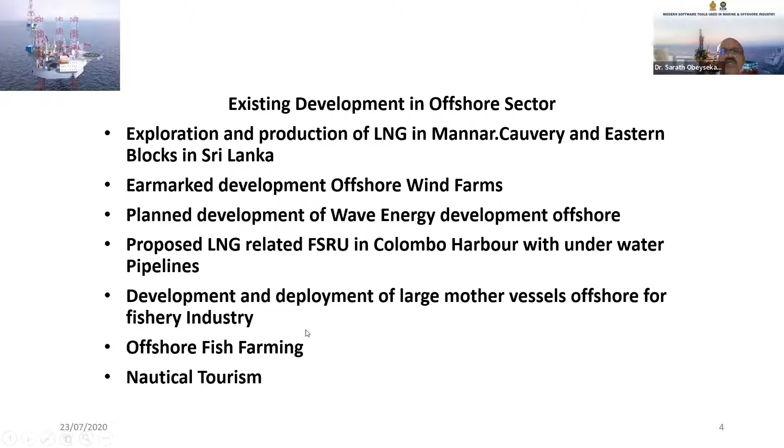And finally, of course, we are talking about nautical tourism, where we are trying to develop, like in other countries, like European countries and Singapore, yacht services, yachting and leisure boats and things like this. We are trying to develop 23 small harbors right around the island. That's other areas.

Our intention is to develop a curricula for existing universities and train engineering, safety and reliability experts, blue collar expertise, and financial experts as well. Also in the planning sector, we want to teach them general use planning tools. The courses may come in time to come.

We will also invite foreign universities to tie up, like some countries do, such as India or even one of those islands near the states. And then we have development of safety and reliability studies in the universities.

We want to give a little bit more than what you learn, training Sri Lankan and foreign experts in conducting hazard and operability studies, safety and maintainability. All these things are related to this high-tech industry of oil and gas.

I've just listed some old companies, but there are new companies which Kapila might introduce - the company which is now going to do a presentation is also heavily involved in this industry. I've just listed some old companies, but there are other target consultancy companies who intend to come here.

If you have read the newspapers recently, Reserve, a US company, has already started some outsourcing program with IFS. And now they are trying to hire students to train them and work in this industry that we are talking about.

I am basically from Trimble, and Trimble is a hardware and software solution provider. For today's agenda, we'll have a little bit of introduction about our company Trimble and what we are, and then we will see about the design and engineering part—process engineering and process design, not the analysis and design, so it's process design and designing the complete shipbuilding.

You might be interfaced with different other software apart from the structures, so how with the help of Tekla Structures this is possible—that's what we are going to see. And then the benefits of BIM modeling: once my 3D model is developed, how the 3D model can be utilized for the rest of the project life cycle. That's what we are going to focus on today.

We also have at the end what we offer for students and how you can learn this software.

Moving ahead, as I said, I'm from Trimble, and Trimble's key things are positioning, information, and communication—these are the three pillars of Trimble as a company. We focus on conveying information to the complete project stakeholders, and on communication, with information that is loaded and can be used for the entire project life cycle.

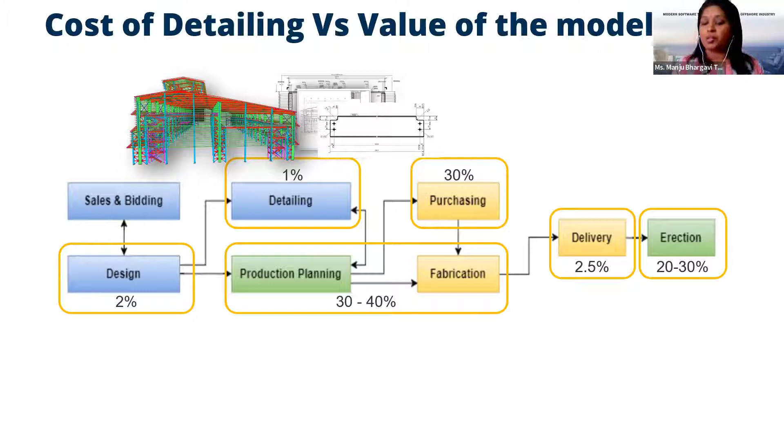So these fabrication drawings are a byproduct of my 3D model. If there are any variations in my 3D model, I update the 3D model, and my fabrication drawings will be automatically updated. So I want to focus on my model only and reduce the work on the drawing and detailing side, because today's young professionals in the sector are not interested in doing repeated tasks, and they always think about automating repeated tasks.

This is where the solution will help out. It will help you extract the materials, which we call MTO, material takeoff. Whatever material you have used in the 3D model, that material takeoff can help you for procurement. It's not only the steel material, it's also any fasteners like bolts and nuts, and also the weld material, which is very important in offshore structures.

You can also plan your fabrication and erection sequences. Based on the erection sequence, you plan your fabrication. Otherwise, what happens, suppose I'm taking an example of two columns and a beam, and if I'm just getting the beam first in fabrication for erection, but I don't have the columns which have to be erected first, there is no point, right? I have to wait until my columns come up. So always plan your erection sequences and accordingly plan your fabrication sequences.

Then you track your transportation, stacking, and all of these things. In the case of steel, it's more about automation. You should have a methodology to link it with your CNC machinery, and at the same time, whatever solution you've developed should be able to do the connections, and you can also extract this information and take it to any connection design software. When you are erecting at the site, you should know whether that particular assembly can be lifted by your cranes, or where my crane location should be so that I can optimize crane utilization.

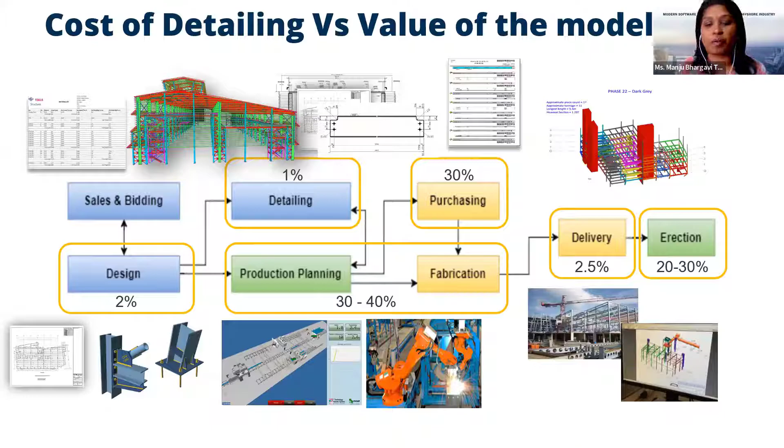So the focus areas, if you see for the execution of the project, I call it constructible. So it also means it should be fabricatable or manufacturable, whatever you call it. So it should be constructible. So when I say any tool that we are selecting, it should be constructible. What I mean to say is you should be able to create the 3D models.

It should also handle changes easily. So the solution should be parametric, wherein if I change the beam sizes, if I change my column sizes or my tubular sections or my miscellaneous steel like handrails, so today my platform size has to be changed a little bit, you should be able to do that. It should be parametric. I just type in whatever the values are and then based on that, it should modify.

So all my deliverables are a byproduct of this 3D model. I just focus on my 3D model, and the rest of the things should be automated, right? And collaboration is also key.

As I said, Tekla is a structural BIM solution, and in any project, you have a mechanical engineer, you have different disciplines. You may have a piping and equipment guy, an electrical guy, a civil guy, a structural guy. So all of them might use different software because everyone wants to use software that is competent enough in that particular discipline.

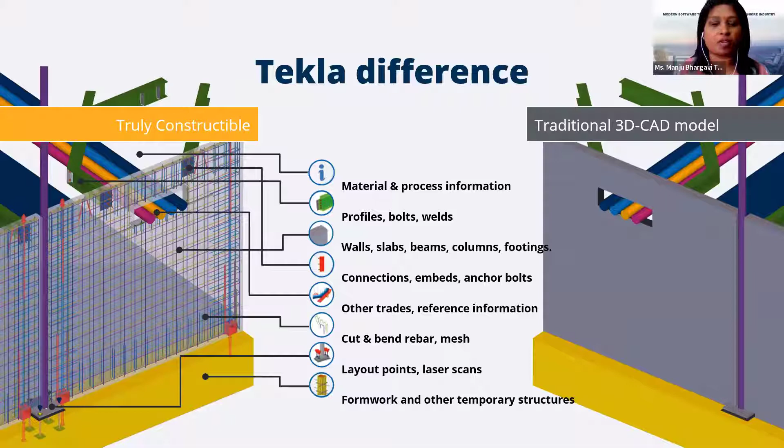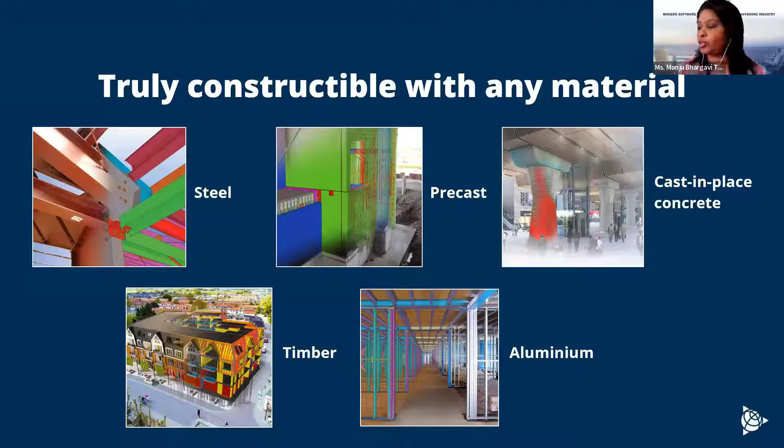So with form work, you'll have complete information once you have your 3D model, which can be used for the entire project life cycle. Every piece of information which is needed. And as I said, take aluminum, timber, precast, any material, any type of structure you name - it's possible to create. It could be bridges, airports, anything. So it's one single solution for all structural modeling.

In the Tekla products portfolio, we have Tekla Structures, Tekla Structural Designer, Tekla Tedds, Tekla PowerFab, and Tekla Trimble Connect. Tekla Structures is building information modeling for structures. Tekla Structural Designer is an analysis and design solution purely for buildings. Tekla Tedds is for structural calculations, basically 2D frame analysis and connection designs. Tekla PowerFab is for production management, a steel fabrication management solution. And Trimble Connect is a common data environment where you can store project information, collaborate, and communicate with other project stakeholders.

As we've just seen before my presentation, you have partnering or consultancies working in UK, US, Middle East, India. We support 36 country standards. So when you take the software, it comes with 36 country standards, and you can work as a consultant for any company using any country standard.

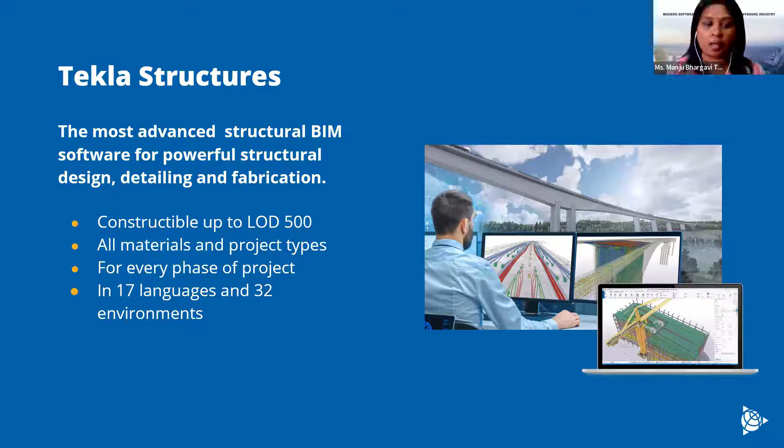Any type of structures - it could be shipbuilding, deck or jacket or platform, any type of structure. So to start with, we'll see Tekla for offshore structures, but also the different solutions we have for modeling, linking with machinery, robotic welding, laser scanning, and other tools. Tekla comes with an open API, so if you want to get into software development and automate some of your repeated operations, using the Tekla API you can develop your own tools specific to the requirement.

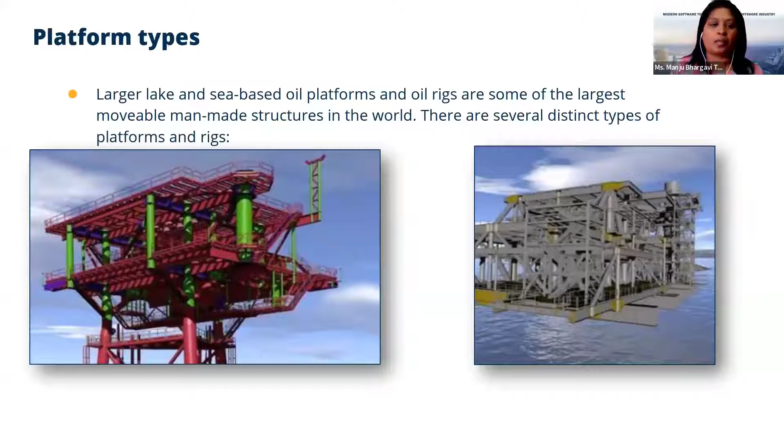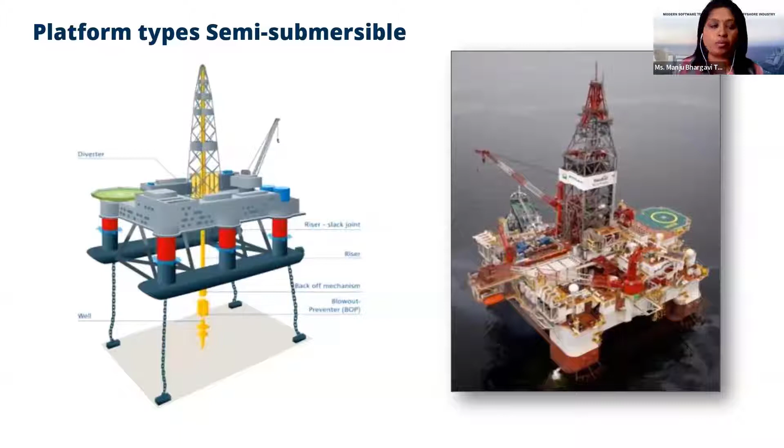Here are some examples - any sort of platforms, fixed platforms, different types of tension platforms. Any sort of platform, and not just with plated elements - you also have profile elements and plates involved. A lot of plates might need to be unfolded or molded to get the shape, so you need to know the exact raw material needed for that.

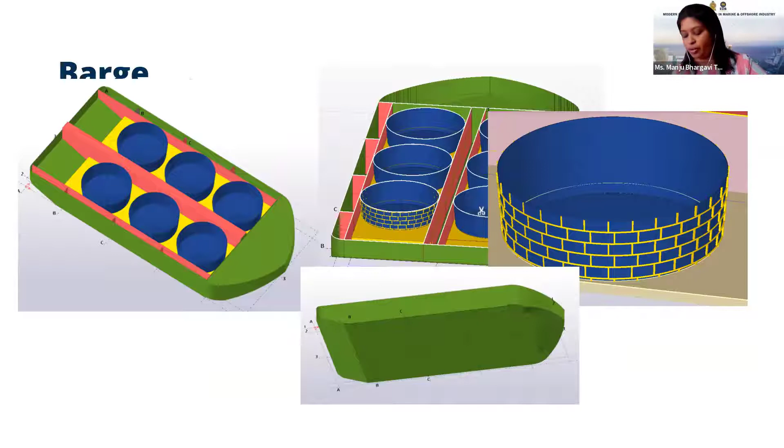Also helipads, then shipbuilding, barges - again completely plated structures, so you need a solution which can unfold this. It's not just creating a steel plate around it; you need information that can be fabricated. Also barges, lighthouses, underwater handling installations like material handling structures, silos, underwater structures, hotels or casinos, floating platforms, wind turbines, lighthouses, and even some concrete structures.

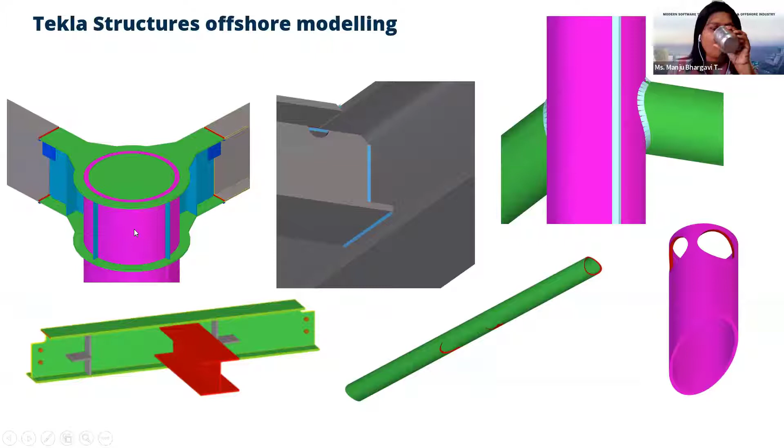Tekla Structures has a complete component library which enables you - we have this type of connections in the library, so you can model the elements and then apply the connections, which come with welds, welding information, openings and cuttings, and unfolding of these structures. You can pick and place from the connection libraries, and when you look at jackets, you need setbacks and offsets so they don't clash - we have tools to model all of that.

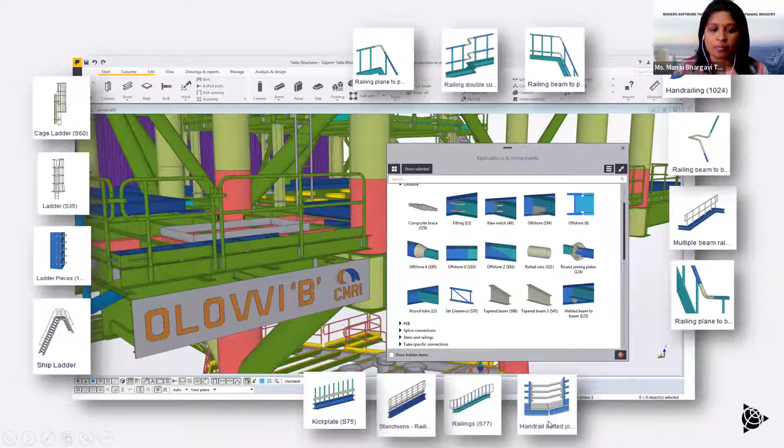All types of welds - welding is very important, and getting the right quantity of weld material is also very important. All these connection libraries are available, so using them it's very quick and easy to create the 3D model. You can see the Tekla interface where you have steel and concrete together, and you can place steel beams, columns, plates, and access the catalog or material library.

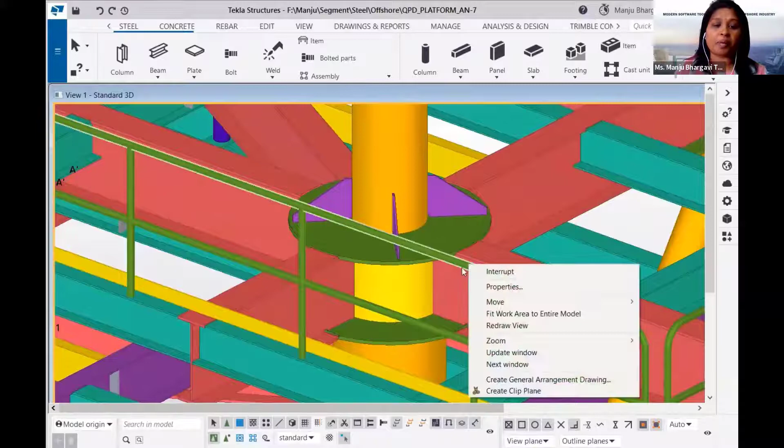This is the user interface of Tekla Structures. You can see here how the platforms, this helideck, and all these are modeled with all the ring connections, ring plates, and different nodes in the offshore structures. Complete offshore structures are more of completely plated sections.

So I can create a clip plane and navigate through the completed model. I'm not getting into the details of how I'll model all of this.

It is very simple: you pick and place. Say, from the tool library, I select a column, then I pick the main part, or suppose I want to place a beam, so I go to a beam and select the profile size. As I said, it supports 32 country standards.

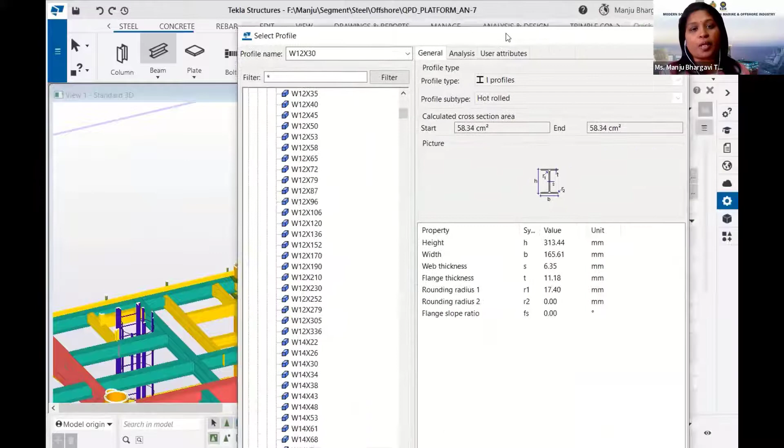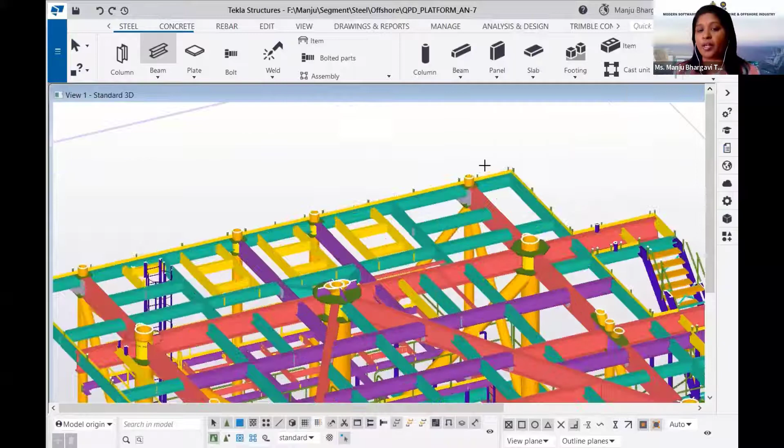From the library, you can pick whatever country standard you are using, and select that particular element. On the right hand side, these are all the standard section libraries, so the CG, the root radius, and the weight are already fed. You define the material, pick the first point and second point, and the element is created.

At any point of time, I just select an inquiry, and it gives me the weight, the material length, all this information.

Now I go to a ring plate and apply it. I select the two beams, and between these two beams my ring plate connection is created. The image may look only circular, but it has options which are parameter driven. I define my parameters, and based on these parameters I create the connections and also the weld details.

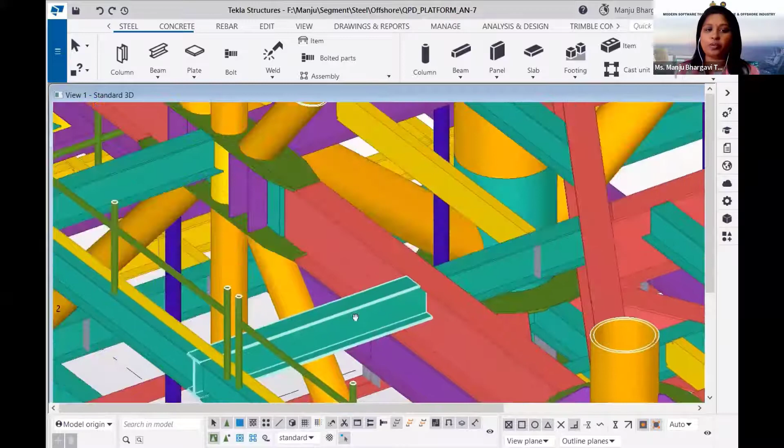These are different types of nodes in the offshore structures. The same single tool can help you apply these nodes at each and every location, and if I want a simple stiffener connection, I'll select and create it.

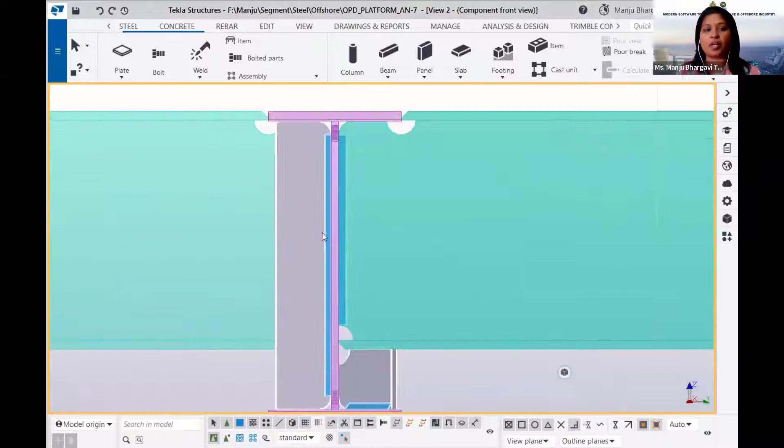Here are the weld preparations. Based on whether it is a butt weld, bevel weld, or fillet weld, you need a rat hole for that, and you can define all of those. Such detailed information can be provided, and when you extract the fabrication drawings, all this detailed information is there, whether it is a field weld, and what is the size of the weld.

If I select any particular assembly and say show selected, it shows me where all the welds are available and where my secondary parts are coming, so how my shop drawing will look like, or how a particular assembly or element will look after the weld preparations and fabrication.

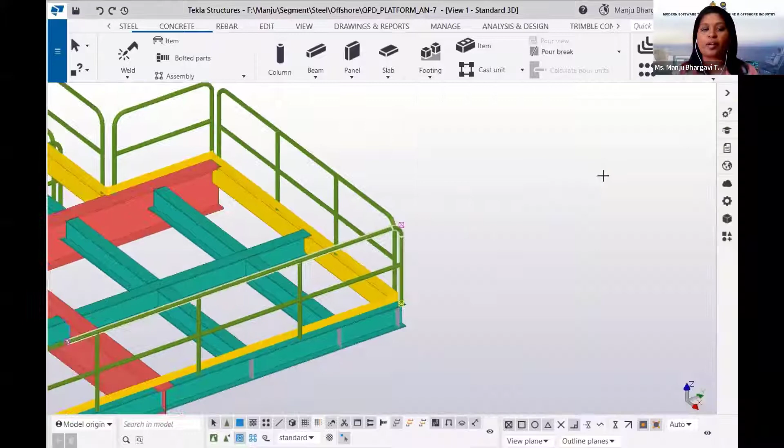Not only this, I have solutions for modeling handrails as well. I define the profiles and handrails, and pick the first point and second point, and I'll be able to create the handrails.

In a similar way, I have ship ladders, then staircases. I just pick the first point and second point, and my staircase is created with all the different nodes.

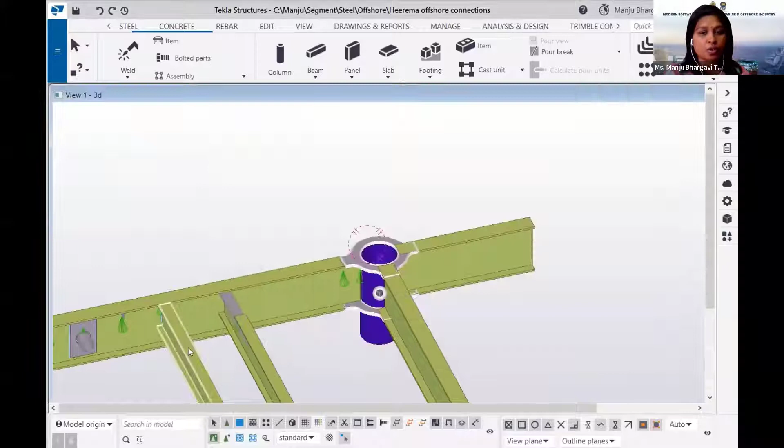I have a model wherein I've just created all the connections to show you the different connections and the library I have for this, how the weld preparations can be defined, and the different other connection nodes that can be applied and created.

Once I create it, I extract the fabrication drawings out of it. So this may be your platform, it may be your saddle, and especially for round pipes, it's very difficult to come up with the fabrication for those.

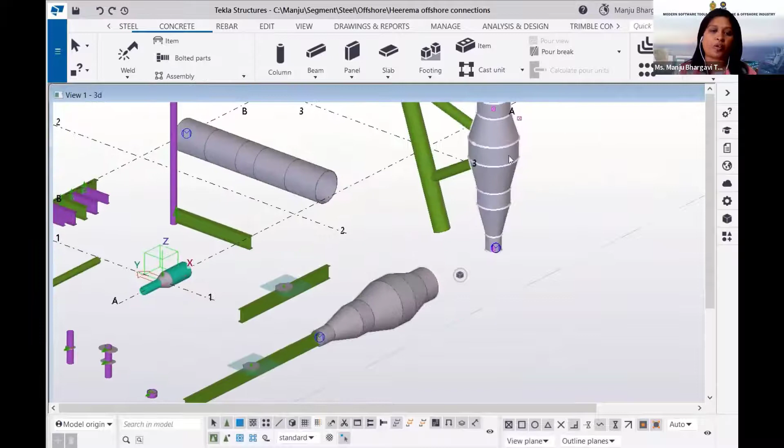Different sizes of jacket legs have different profiles, so reshaping of these profiles - it's a single solution which can help you model the jacket legs, stiffener connections, and splice connections.

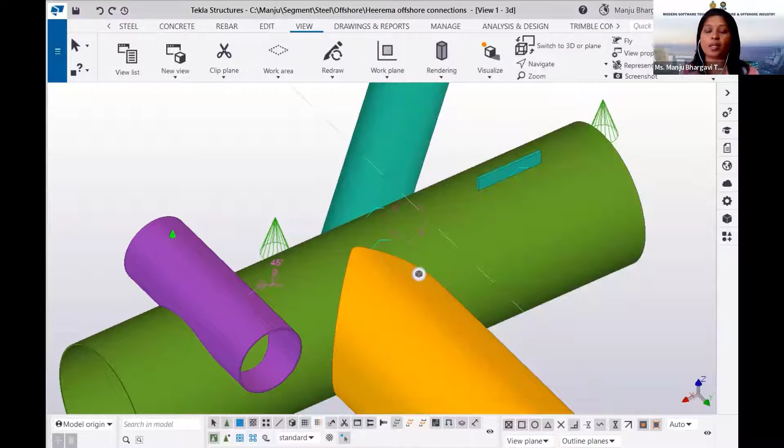Here are the information on the type of weld, and if you define all this, it will be automatically taken to weld preparation machines and CNC machinery for cutting and weld preparation of these tubular sections. They can also extract the report with the weld material.

Once I create the model with the structural model, I can use it for my plant integration. You can see AVEVA, Intergraph, CADMATIC - these are some of the solutions. Tekla Structures is open, it's an open BIM solution, so it can take in STEP, IGES, different file formats like DWG, DGN, SDNF, XML, IFC, CIS2.

Once these file formats are available, you can have an interface. We also have an interface with SACS, which is again an analysis and design solution. So once you have created a model in SACS, you can import that model into Tekla Structures and further take it to detailing.

So what we are doing is, from the design stage we are able to take the input. We are not creating again from scratch, we are keeping on adding the data and reusing the information. In this case, there will not be any chances of missing any information. You can do your piping and equipment in any solution, and then attach it as an interface to run the clash checks and all.

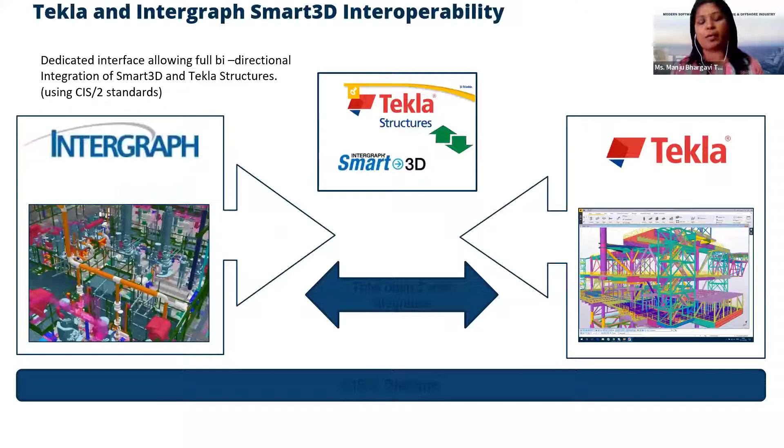CADMATIC, Smart3D, Intergraph, and then AVEVA - all of these, IFC is IFC, the full form is Industry Foundation Classes. For the 2D formats, DWG and DXF are the common file formats which are accepted widely.

In the similar way, when you want to exchange data in a 3D file format, IFC is a file format which has to be commonly used. Any solution or software which is able to come up with an IFC - that is a common platform now to exchange data in a 3D file format.

If you go in detail with Tekla Structures and E3D, that is the AVEVA solution. In AVEVA solution, what we can do is use Tekla Structures because Tekla is good from the structural point of view. So I can create the model in Tekla Structures.

Then I can export that model to my piping. I can either attach my piping and equipment as a reference within Tekla Structures. I can rotate, navigate and see, I can run clash checks where my equipment is exactly coming up, and based on that plan my equipment, foundation, pipes, piping and pipe supports.

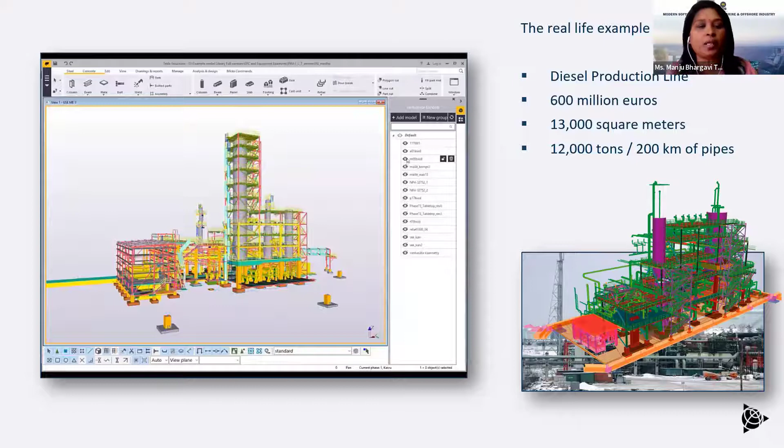All these I can attach as a reference so that it will not load up my model or increase the file size - these are all references. Now this is purely from a structure point of view. Like this I can come up with a complete model, create the model, and then export these solutions to AVEVA.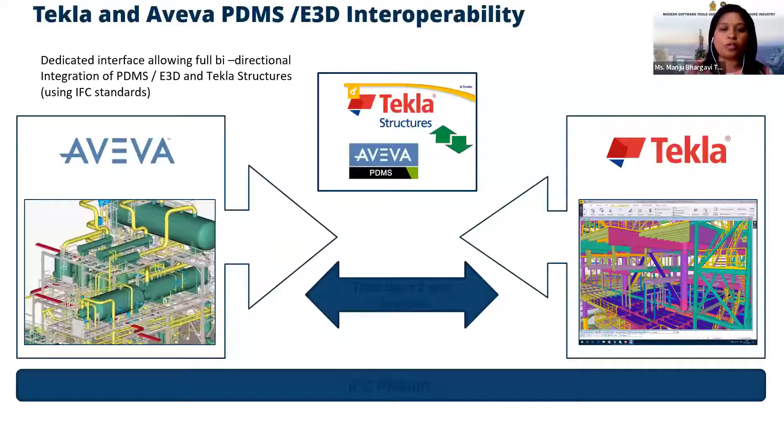So when I come back, when I import this from Tekla, I can import it to AVEVA - just select and import. It comes up with different mapping files, because the name nomenclature in Tekla and nomenclature in other solutions might be different, but we have come up with a mapping. First time import, it just imports, and second time it shows you what are the changes.

Like this I can import, and once I import back in AVEVA, I check with the equipment or piping, and in case there are any changes, if that file is changed, I can import the revised model back to Tekla Structures, check what are the changes, and then update those changes.

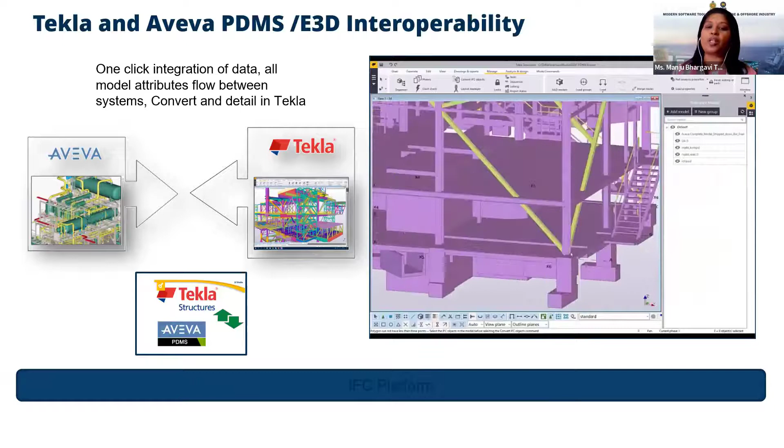Instead of doing the change communication and everything using 2D sketches or 2D drawings, we directly exchange the model, and it also shows you what are the changes, what are the variations, and then you can go through immediately.

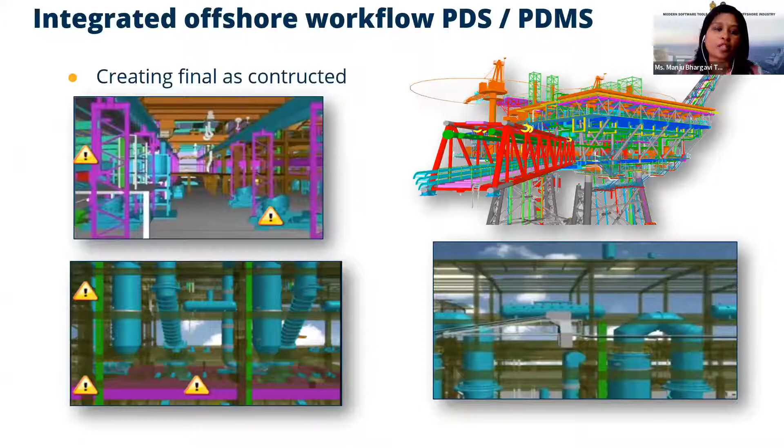You can also run a clash check on the final model with complete disciplines and see. So this is my Tekla Structures model - I am attaching the interface of my piping and equipment to my Tekla Structures model, so that my complete offshore structure is ready and I can use it for clash checking and all.

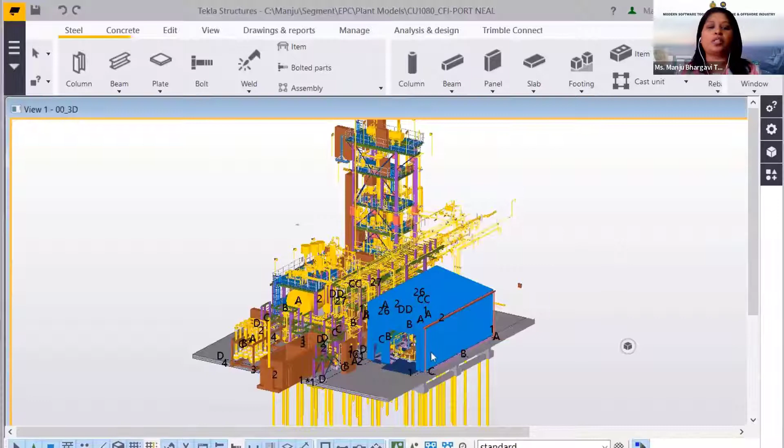So if there are any changes, I can see. This is how I can come up with the reference models, navigate along with my piping and reference. That's what I'm saying - what you see is what you get. If it fits here in the virtual model, that means it also fits at site.

I'm not getting into detail about how to model and all that, because it's very simple. It's a menu-driven software. Just select and then place. It's a very easy software to learn.

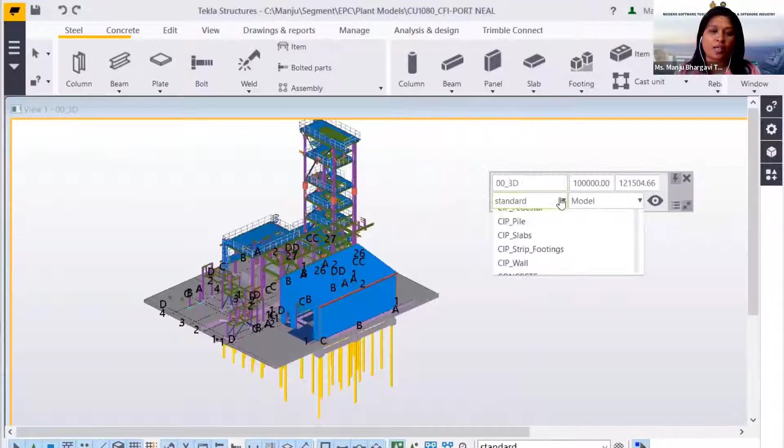At any point of time, I can switch off my other discipline models and purely work on Tekla Structures only. Then suppose I want to go back to civil—that's my platform, with footings, cable trenches, and all—so I can filter those out.

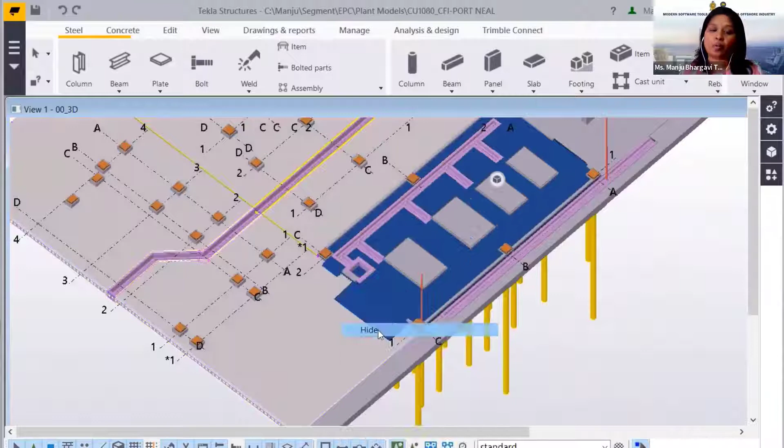So you see, this is a single solution, as I said, which enables steel and concrete together, where you can do reinforcement detailing, steel fabrication, and all other things.

So you can extract the drawings out of it. Just select that and extract the drawing out of it, and your drawing will be ready. If there are any changes, you just update the model.

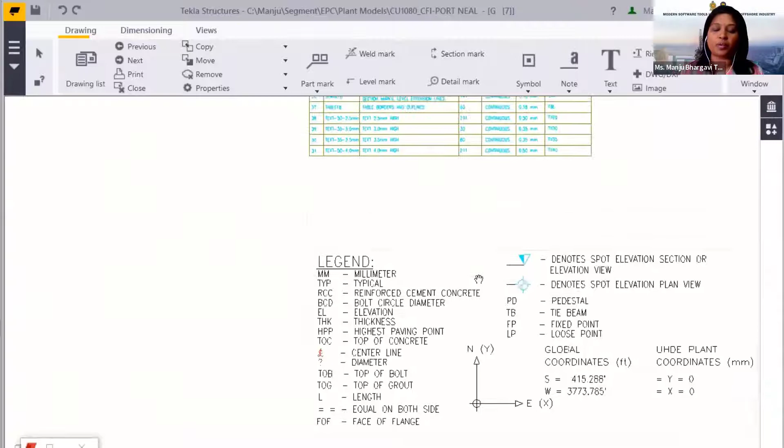My drawing is a byproduct of that. I need not sit and draw any single line over here. From the model, it is converted into 2D. And if required, text and all can be customized or automated.

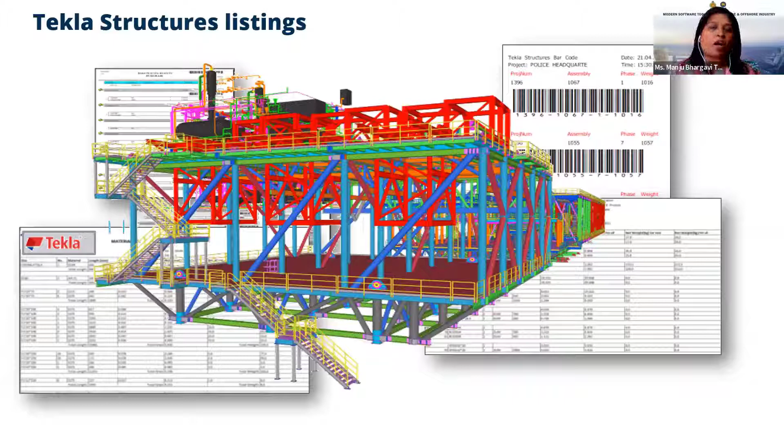As I said, all types of reports along with barcoding and all can be extracted. All type of fabrication drawings can be extracted along with the welding preparations and welding information—some GA drawings, or general arrangement drawings as we call them, and some examples of detailed drawings.

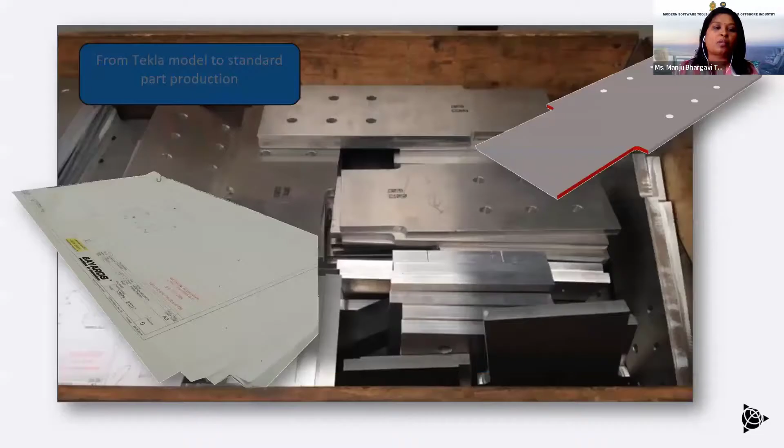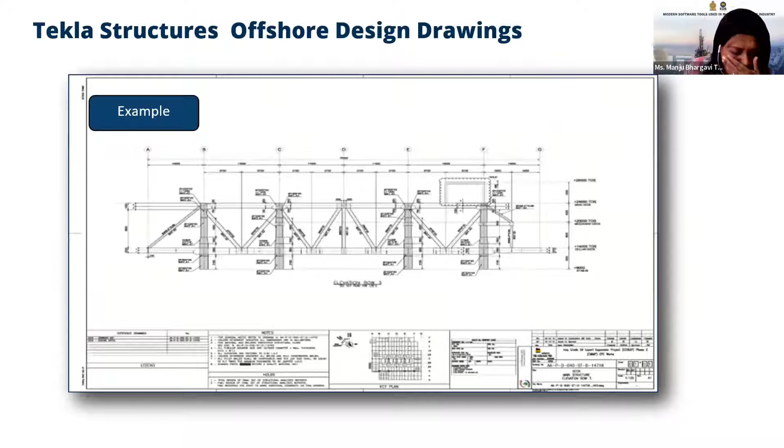Some more examples of platforms, side elevations, and detailed connections along with weld details. These are all completely automated, along with my weld annotations—all coming automated.

So it's error-free information, because as I'm saying, you just check the model—my drawings and all the weld preparations and annotations are automated in my drawing.

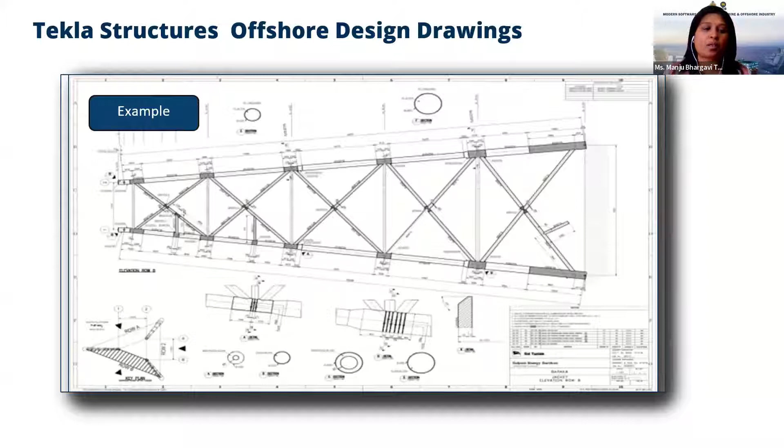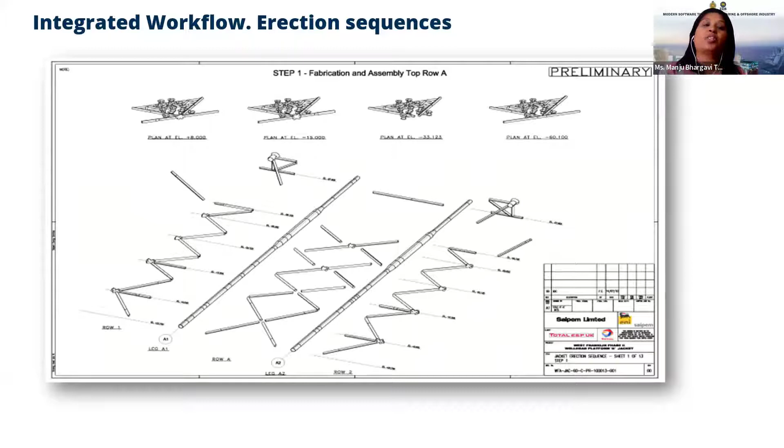You can also extract drawings for your erection sequencing—what has to be erected first, what has to be erected next. Normally these are welded near the shore and then transported, so based on the different erection sequence, you can start erecting it.

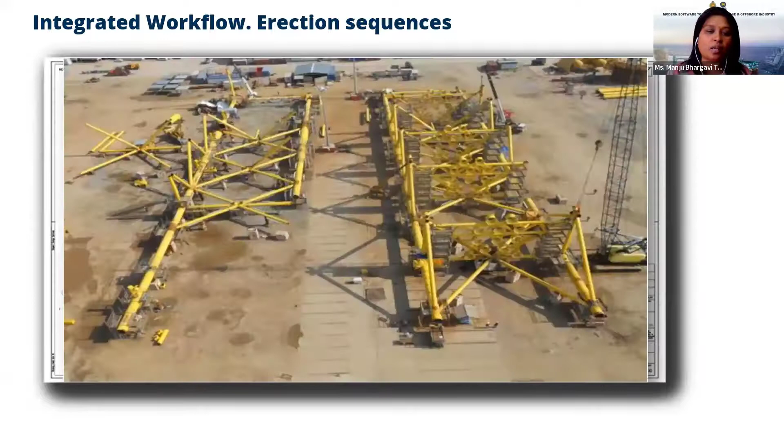Then, how it has to be lifted—all these simulations can be done, including from where it has to be lifted and where your crane location has to be placed. All this planning can be done beforehand, so you need not redo the planning at site. Most things would be planned well in advance, and when you plan well before, the surprises at the site are less.

So once my 3D model is done, we have seen how to integrate with other disciplines, how to extract the required deliverables like drawings, and also the material takeoff.

Then it can be exported to CNC machinery. So whatever model we have done, we can directly export the data to CNC machinery.

When you open it in the CNC machinery, you need not sit in the fabrication shop with chalk and drawings anymore. It already scribes on the main part where my secondary elements have to be welded and which part has to be welded. It's very easy at the fabrication shop, and there are no chances of errors there.

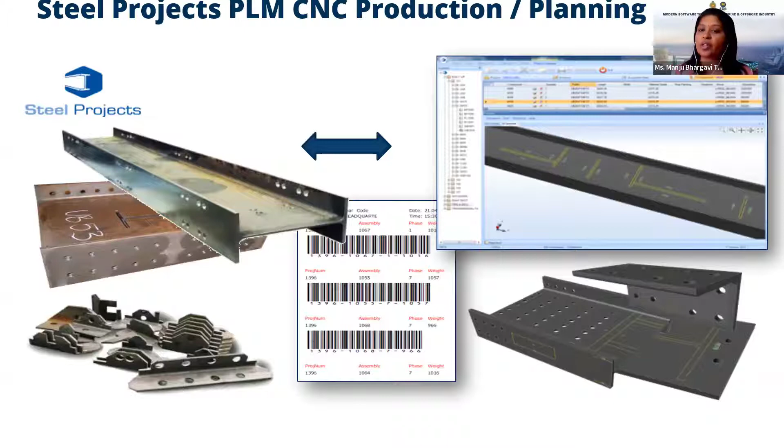So like this, once I import the CNC file, I'll be able to view before it starts cutting, before it starts drilling, and before it starts welding—where exactly my secondary members are coming and which parts have to be welded to this particular assembly.

It's also input to the plate optimization, because I have a lot of plates which have to be cut. I have to arrange the plates in such a way so that I minimize wastage of material. So from my entire model, all the required plates are extracted and input into a software like Steel Projects, which does the optimization for me—it tries to nest and arrange the plates so that it results in minimum wastage.

Steel is very costly actually, so optimizing this material is very important.

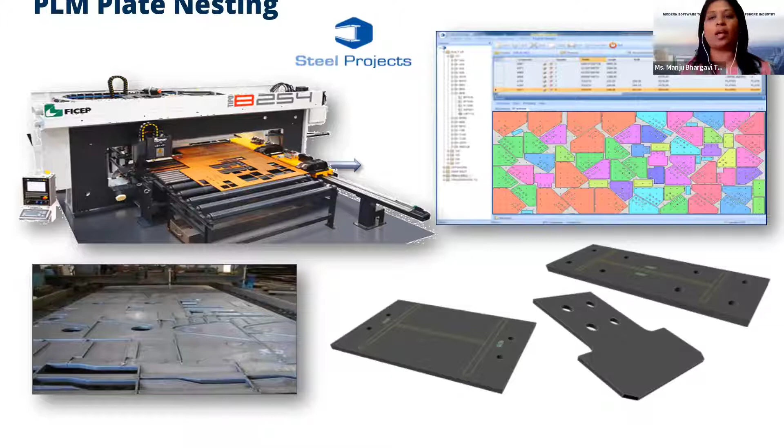Not only for the plates, even if I have profiles, we call it bar nesting. Suppose I have 6 meters length of a profile, and in my model, somewhere I've used 3 meters, somewhere 4 meters, somewhere 6 meters. So it tries to combine the lengths in such a way that I end up with minimum wastage.

So like this, it can automate, and if you have an automated fabrication yard, it can optimize your material and optimize your production even further.

From the offshore structure, you may have different types of connections coming up, and based on that, the plate or profile has to be cut. Especially pipes - cutting pipes is very difficult, and cutting it error-free manually is very difficult.

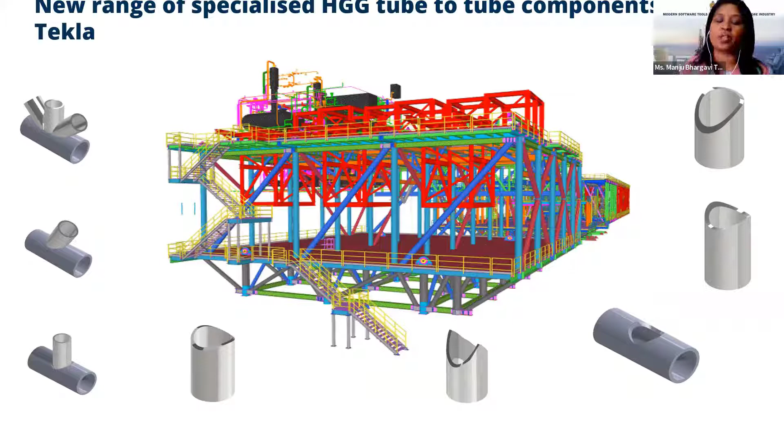So you can export this information along with the weld and weld preparation information to HGG machines, which are very specific for tubular structures, and then extract it.

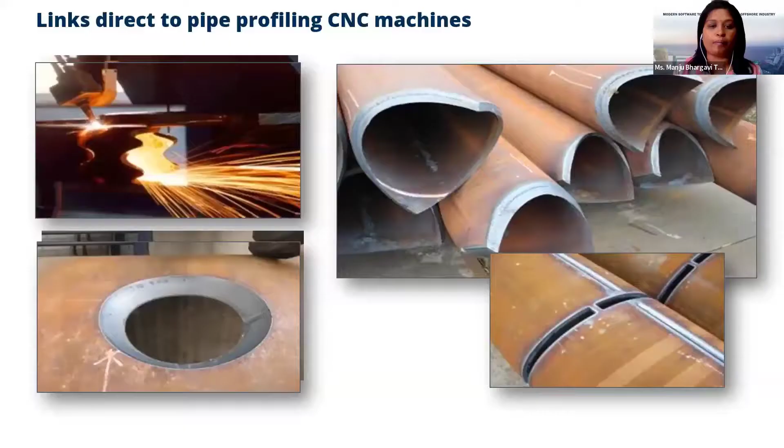For these tubular structures, you export the data to HGG machines so it does a clean cut of the pipes, which can be used directly for welding. As it is automated with CNC machinery, the accuracy is well maintained, and the speed and productivity are also much improved - these type of profile cuttings.

As we've seen in the earlier video, this CNC machinery information is not only for cutting and drilling, it can also be used for welding automation. We have welding robotic machines wherein I just feed in the assembly, and it picks up the respective parts and the type of weld I have defined. Based on that weld type, it automatically welds. So much of fabrication automation can be done.

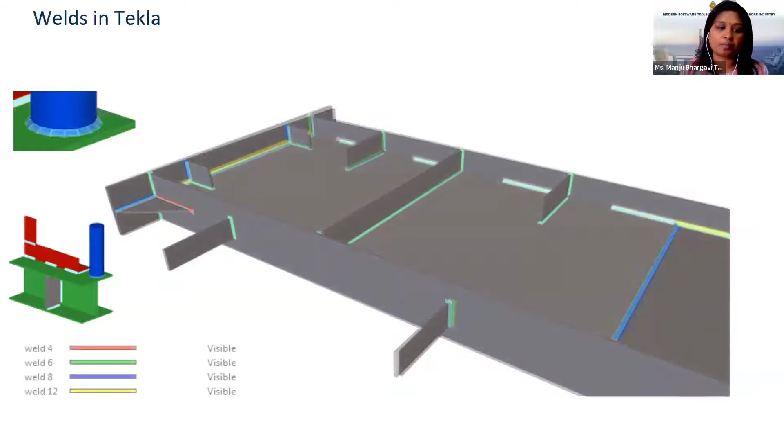As I said, weld reports can be extracted and the exact weld quantity can be extracted.

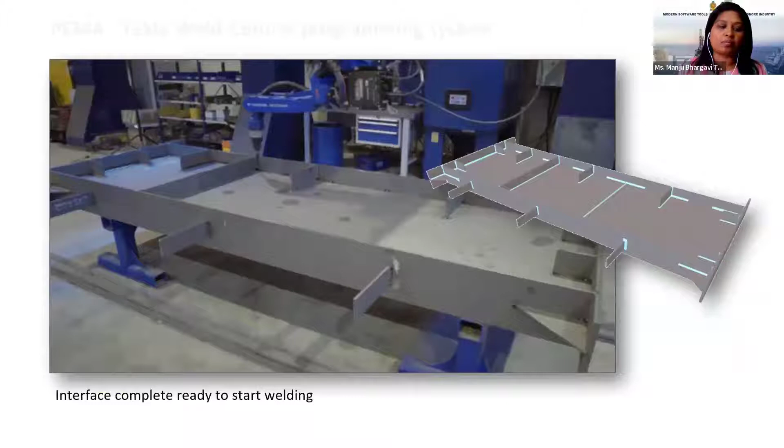Once fabrication is done, you also want the data taken to the site. So if you want to take the data to site or to the total stations, we also have integration wherein from the model you can pick up some points which you want to take to the site or the layout machinery.

From the 3D model, you export the data to layout points, and that data can overlay at the site, and then you'll be able to see. It also accepts 2D drawings and 3D models as well.

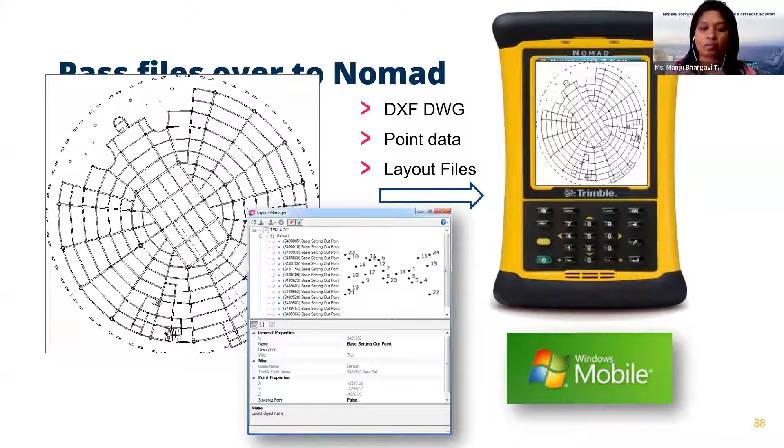In case you are planning for an existing structure where you don't have drawings or as-built drawings, physically going and measuring to create a 3D model, or planning maintenance activities, it's very difficult to deploy a person at site each time to measure all this. So we have laser scanning devices which can be used for accurate laying of the model at site.

This is because the LM80 machine which I've shown you is just simply DWG and DXF. But these laser scanning devices from Trimble can also take in the complete IFC model or the 3D model, and then that model-based laying out is possible.

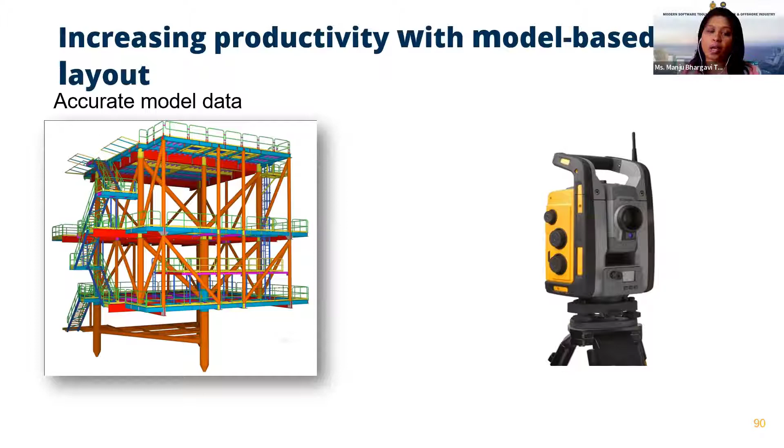Laser scanning devices are not only for as-built verification, but in case you have any old structure, you can scan that. It can scan the complete data in a point cloud format, and then you can import that into the virtual model and cross-check whether all the assemblies are as per the virtual model or not, or the existing structure, if you want to create a model of it.

You scan the data and import it so that you know what the existing structure is, and then from there you can plan your retrofitting or expansion of that particular structure.

We can also place a model in Google Earth.

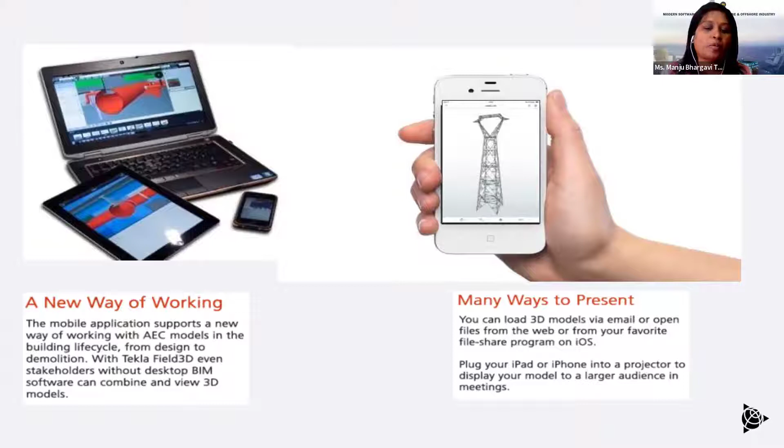Once the model is developed, the information is at your fingertips. You can export this information to the common data environment, which is Trimble Connect. Once you upload the models and drawings to Trimble Connect, you'll be able to view this information on your mobiles, desktops, and iPads.

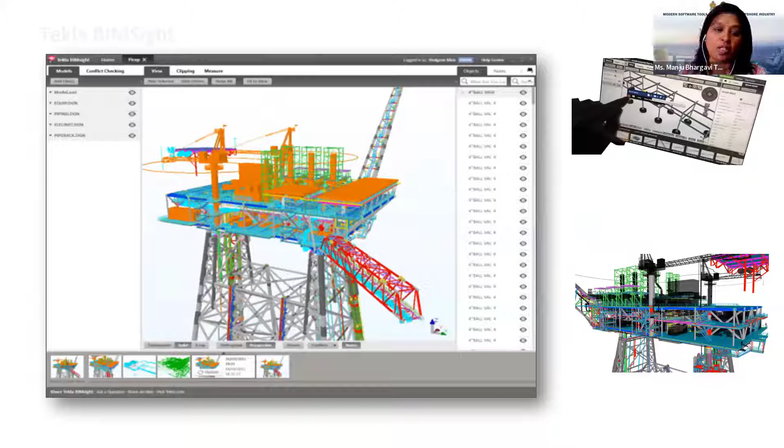Without Tekla installation, you'll be able to view all this information. This means not just a 3D model, you can also create walkthroughs and see attributes like weight, volume, center of gravity, and erection sequencing. All this information can be seen.

Last but not least, Tekla has an open API functionality. If you're aware of .NET API, you can interface with Tekla Structures. It can help you link with ERP, create your own component library, and interface with layout systems. So you yourself can develop your own applications, like parametric models and linking with layout machinery, all done using the .NET API.

You can take these up as projects in your third or fourth semesters, working on developing components with interfaces, or automation with robotic machines and robotic welding technologies. We can help you out with such types of projects as well.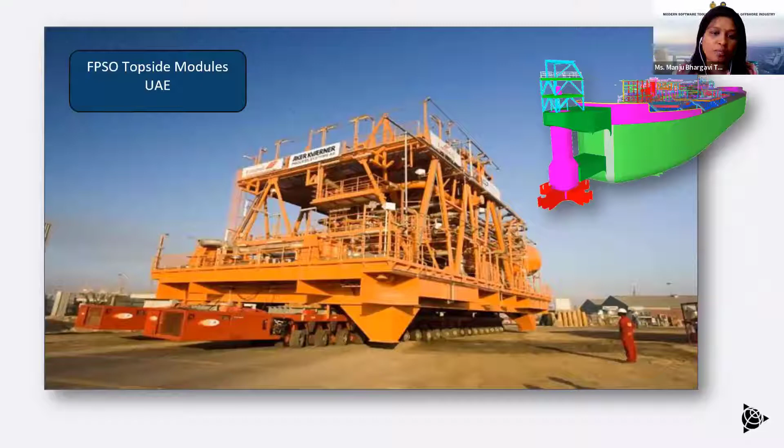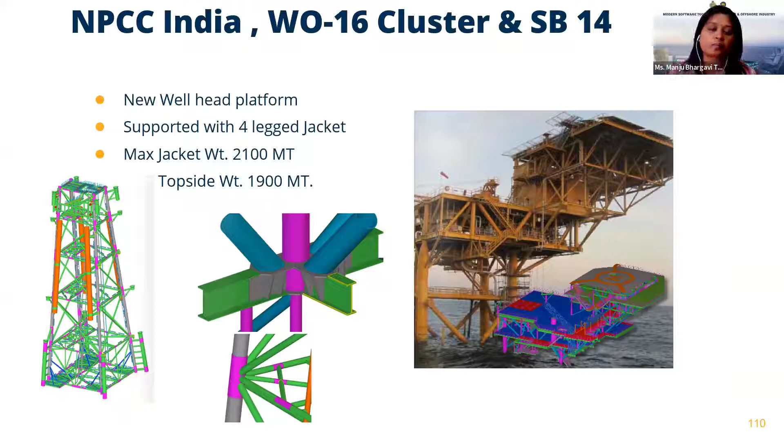This is a platform structure in India, a jacket structure with different jackets. This is an NPCC model showing the type of connections. NPCC has worked with Open API and automated some components here. If you see these nodes, they've developed components that help in quick modeling.

Before I end this, the session is open for questions. As for what's available for students, as Mr. Kapla already mentioned, we are partnering with education institutes to promote the solutions so you can come up with the required skills for the industry.

For Tekla for education, you can go to downloads.tekla.com, where there are 4 steps: register with your email ID, any personal email works, activate the Tekla online licenses, and then download the software. It shows complete information like which version and country standard you want to work with, and if you need extensions, you can download those.

It can also take you to the Tekla webinar pages, which come with many training and skill sessions where you can learn more. Tekla is also coming up with different other products. There's a startup troubleshooting guide, videos, and first steps with Tekla Structures, all of which will help you learn the software.

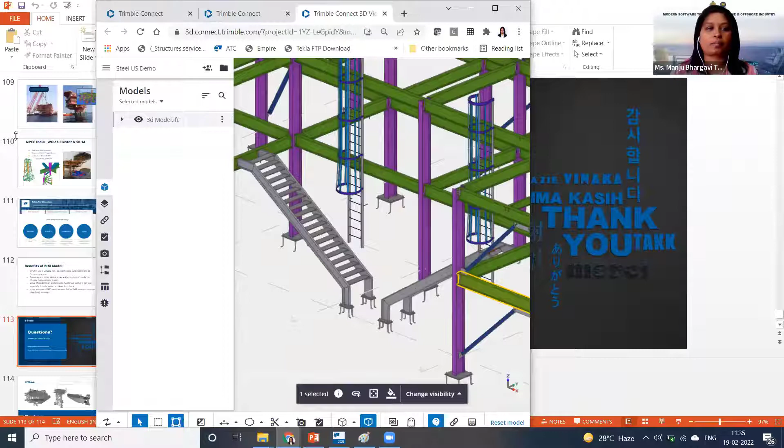So you go and just select any of the elements, and then you see the complete object information at the side, like what type of element it is.

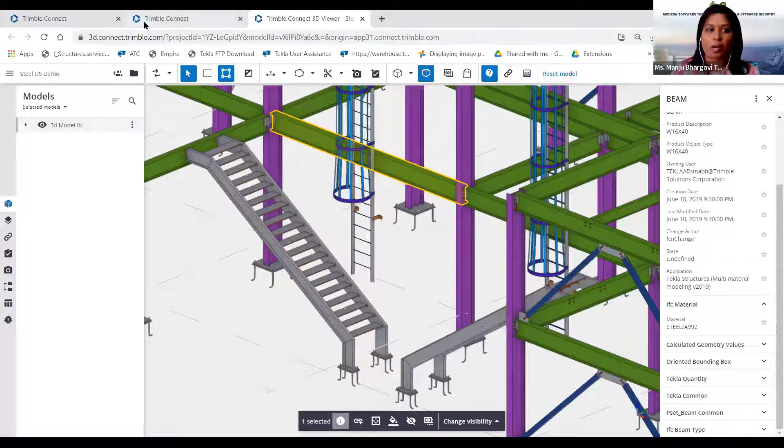Here you get the material, the weight, all these things. But apart from this, if you go back, you get the drawing of this element. Not only this, but everything exports as a DXF file format, as I said, DXF is a common file format acceptable anywhere. So this can be exported to a DXF file format, which enables you to do bar nesting or plate nesting.

Also, for profiles, basically there are a lot of Excel sheets or applications using Excel sheets, and you can do bar optimization as well. Or using our open API, based on what solutions that company or client is having, people can develop their own applications using our open API solution. They can develop their own interface with any software, which is again open API enabled.

So does that mean Tekla can download the model in terms of disintegrated components, like the nuts and bolts and pieces and their specifications separately, for the manufacturer to upload to their applications? Yes, that helps with a compatible way of getting the bits and pieces together.

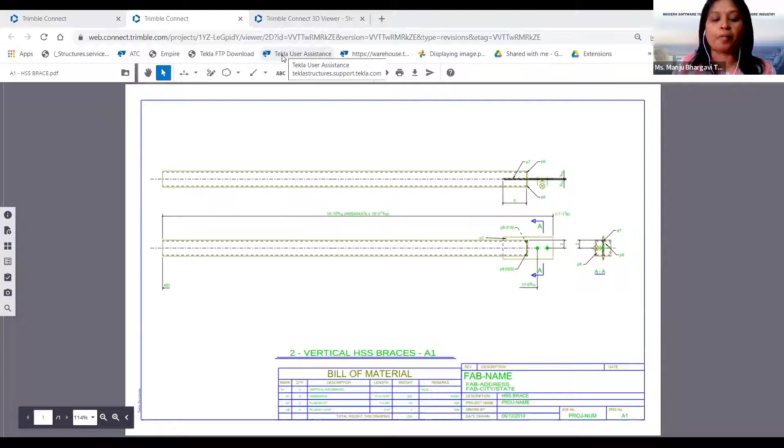One of the questions I have is, in today's webinar we were mainly focusing on academics, research students, and some working engineers. You said you can have collaborations with educational institutions, providing software assistance. So how can an educational institution collaborate with you to introduce this software?

We provide education licenses to all institutes with very nominal charges. It's around, we call it Trimble Technology Lab.

So it's not only Tekla Structures, but the whole Trimble product portfolio - we have SketchUp, Tekla Structural Designer, and in some cases our hardware equipment as well. But when hardware equipment comes into the picture, the software is given free of charge, but the hardware has to be purchased.

Software solutions will be provided with educational licenses on a yearly basis, so every year you need to renew it, with some very nominal charges for that. A separate educational version will be given, and there are no limitations on that solution - you'll just get a watermark saying it's an educational version.